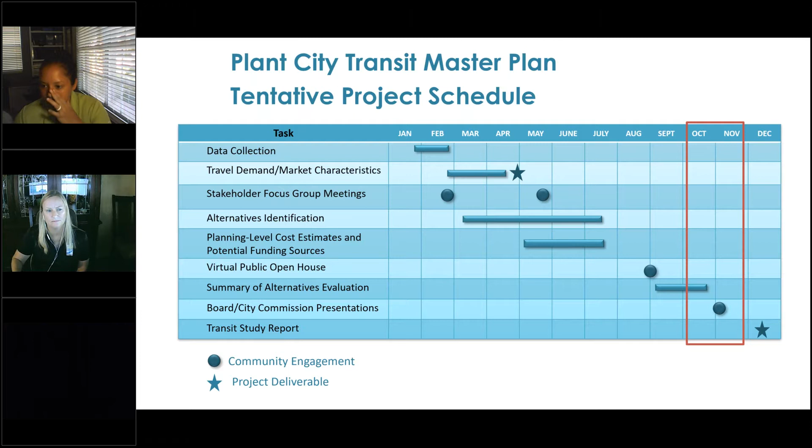As far as the project schedule goes, the schedule was extended because of COVID-19. We were hoping to wrap this up mid to late summer, but now we're at the part where we're taking it to our committees and board. We did have 3 rounds of public outreach, including 2 stakeholder focus groups, the second of which had a large survey outreach portion where we received about 120 responses, and then a final virtual public open house.

Those were services provided initially by HART from 2001 to 2005, and then extended through service grants by Plant City from 2005 to 2008. The highest ridership was in the 2006-2007 fiscal year with about 47,000 riders. There was also the 28X, the express route that went to downtown Tampa, with 2 round trips in the morning and 1 later trip in the day, operating between 2010 and 2017 with a peak ridership of just over 14,000.

As far as commuting patterns for this area, it is largely single drivers commuting. 84% of drivers commute alone, with a median travel time of 23.6 minutes, and 18% of residents travel less than 10 minutes to work. So it is sort of a large bedroom community with most workers traveling outside the area. Only 1.5% of households in Plant City have no vehicle.

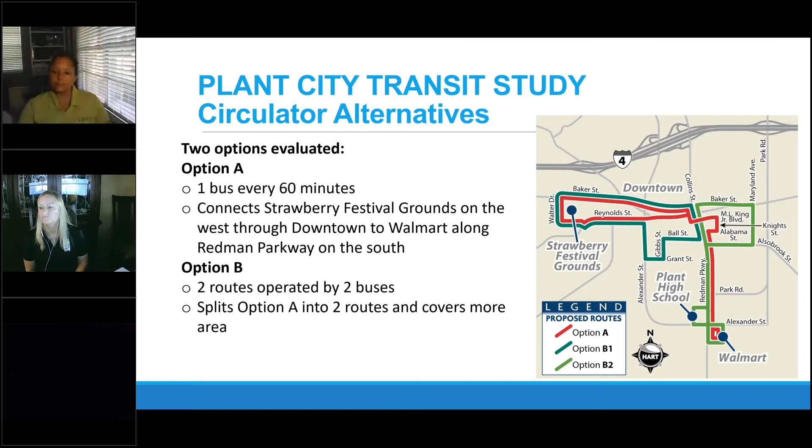As far as the circulator routes, there were really two scenarios looked at. Option A was one bus every 60 minutes, connecting west to the Strawberry Festival grounds, then through downtown and south to the Walmart. Option B mimicked that but separated it into two circulators with a more expansive route, still connecting Strawberry Festival with the Walmart, and a little further east of downtown.

Option C was looking at an on-demand service, similar to the Downtowner that we have in downtown Tampa. This was something the community did think was interesting, though they weren't sure if it would work immediately downtown within Plant City.

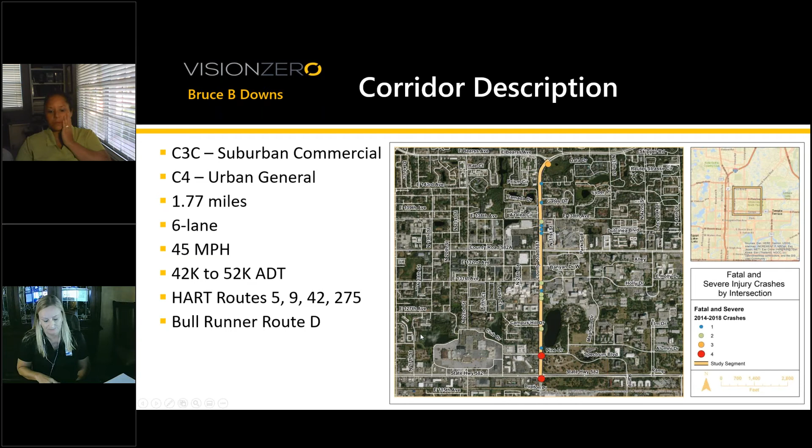Okay, so first up is Bruce B. Downs over in the university area. It's from Fowler up to Bearss, 2 contextual classifications throughout the corridor, so the recommendations reflect that - not quite 2 miles of length. This one's a more intense corridor: 6 lanes wide, 45 miles per hour, significant traffic counts, several HART routes, and the university transit option that traverses the corridor.

Over 1,500 total crashes, 28 of them severe and fatal. You'll see a lot of them occurred at nighttime, so you will see a lighting recommendation as one of the responses. And then we have a breakdown of how many involved our vulnerable users.

These are the locations - not surprisingly, a lot at Fowler Avenue. These indicate some special complementary projects outside the scope of this report that are going on, which are good news to add to the safety of the recommendations. And you can see we're still trending not in a great direction for our bicycle and pedestrian crashes.

So here's those projects. At Bruce B. Downs and Campus Hill, they're adding a new traffic signal, also at Richard Silver Way. Again, it's a dense residential area with lots of students traveling back and forth, not a lot of gray areas for them to have controlled crossings - so these 2 new signals will be amazing.

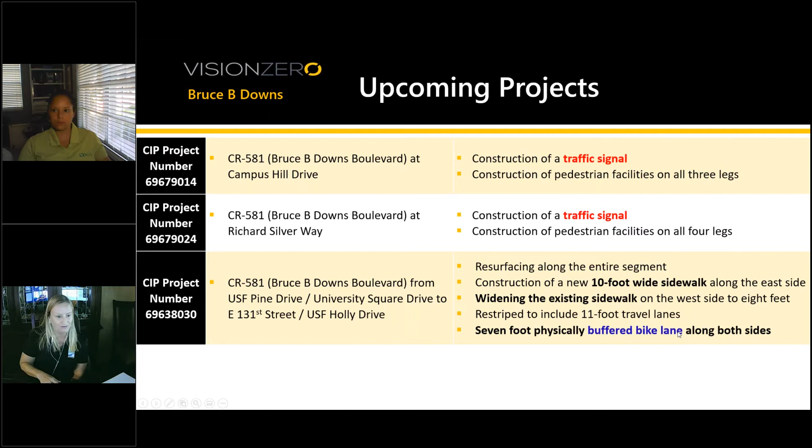Also, as part of the resurfacing, they're widening the sidewalk along this segment from Holly to Pine and adding physically buffered bike lanes on both sides. That's a really cool complement. So some other things for ours.

So the public outreach - what did they say? People said people are aggressively driving. Lots of turns from Bruce B. Downs onto the side streets were concerning. People driving too fast was the highest number one concern, along with walking and biking across the boulevard. Not surprising that that needs to get addressed.

So some corridor-wide recommendations: speed management, definitely - it would be great to target a lower speed along there. And then north, like I said, there's a different context, so a 40 mile per hour would be a little more applicable there. A lot of ADA issues with elderly sidewalks and ramps need to be brought up to code to help improve access.

Some signing and pavement markings, definitely - alerting people hey, you're supposed to stop, not keep going. Green pavement markings at conflict areas would help with that. This roadway also has swales and some standing water issues, so we're recommending improvement there, because it's not great to cruise through the puddles. And lighting, as I mentioned earlier, is important.

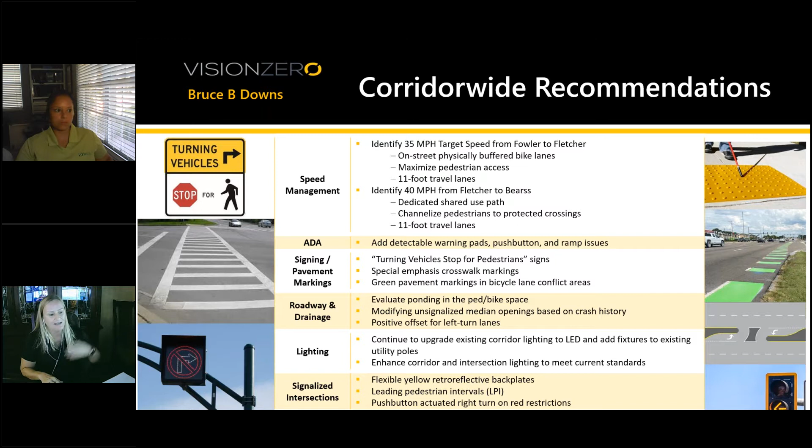Some signalized intersections need improvement to the already existing signals, with leading pedestrian intervals and push buttons so people aren't just sitting there forever and tempted to run across. At Bearss, we have channelized fast-turning movements, so some improvement to the geometry there would help safety. A new pedestrian crossing was seen as a potential at this location.

Definitely some special emphasis crosswalks, because some situations don't have that, or don't have all legs of them present. A potential bulb-out was considered on Fletcher, and drainage again. At Fowler, we're coordinating with the Department of Transportation - Alex Henry is on the call - and he helped provide DOT's improvements to a lot of things at that intersection, so we complemented and continued that effort heading north.

Okay, now I'm transitioning to Fletcher Avenue, and the crash locations were Nebraska, Florida, North Boulevard, and Rome. They had fewer crashes - 900 - but a lot of severe ones and a lot of bike/ped crashes. The types are rear-ending and angling, and they just flip-flop in ranking here between the severe and total counts. That's the type we're addressing in the recommendations along Fletcher, which is a different characteristic roadway - it's 4 lanes with the center lane being a dual turn lane, and it's a longer corridor at 2.5 miles.

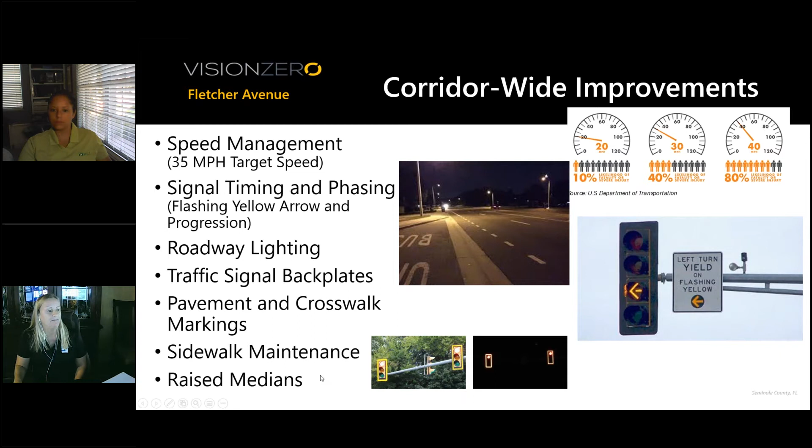So raised medians, I'll just show you one example. Since it has that kind of suicide lane, the dual turn lanes in the center, at key locations where we had crash problems we're adding a little raised median, enhancing the pedestrian crossings. There's a lot of gap between them, so with the appropriate study a potential new signal could be implemented at OLA. Reduced radii also helps with this — you can see they're very generous, designed for the car instead of the people.

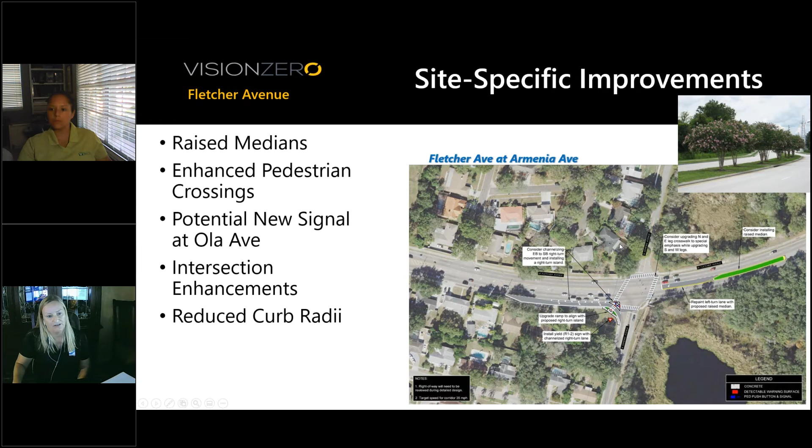All right, Lynn Turner Road from Ehrlich to Gunn Highway. The top crashes were at Ehrlich, at Gunn, and at Laguna Woods Court — same type of crash, rear end and angle, just in different order. 17 severe. This one has the same posted speed but is smaller, two lanes with a smaller traffic volume, so it's more of a residential connection between these two areas. You can even see some green space in between, reflecting that different context in our recommendations.

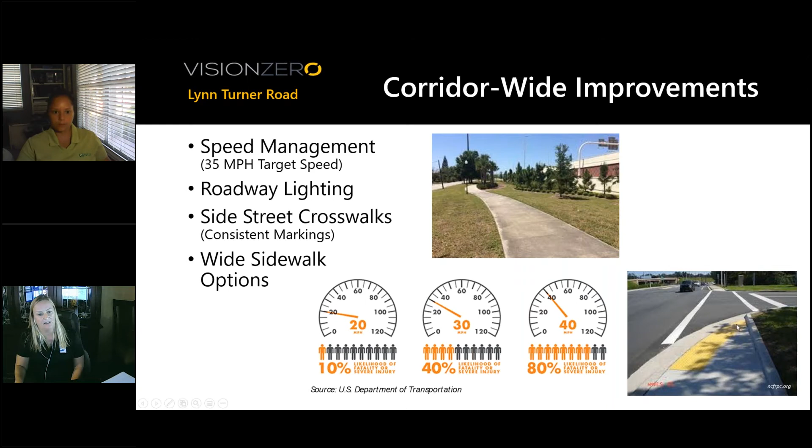What this community said is high speeds, unsafe turning movements, and poor lighting — those were their top issues. So we're addressing the speed, adding speed management, road lighting, side street crosswalks because that's where some of the issues were, and wider sidewalks. This is a pretty small sidewalk, so giving them a little more space, enhancing the pedestrian crossings, and a gateway feature at Gunn might be nice because of the stormwater feature there and the really fast turns. Then raised medians at key locations, especially in and around the school located along this corridor.

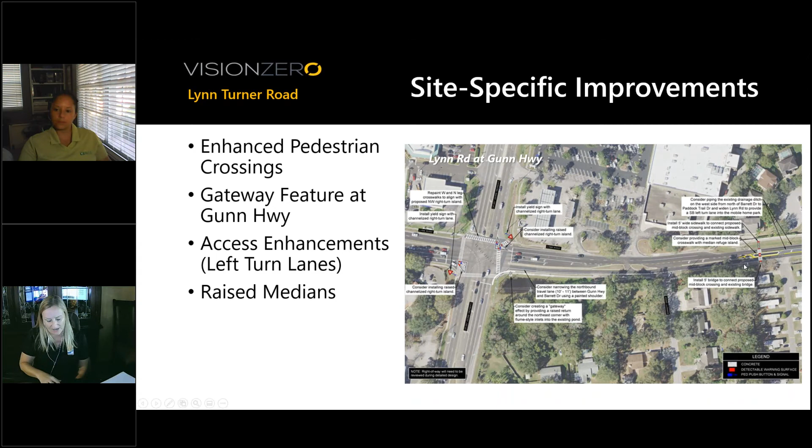I didn't say at the beginning, but it's probably evident by now that these reports are very thorough and complete. We're just hitting the highlights because we have eight of them to cover with you, but they're all in the packet and on the website if you'd like to see each location and get more details.

Last one for me, then I'll turn it over to Wade, is Sheldon Road. A lot of the crashes occur in the evening, and the majority were mid-block and at side streets. 78% of them, a very high percent of the fatal ones, were from the residential side streets. 64% of the bicycle and pedestrian crashes were actually in legal crosswalks. It's not surprising we have a lot of side street issues because there are many side streets along this two-mile corridor. We have 28 intersections and 24 bus stops, so it has a different context than some of the others.

So what did the people say? Well, 44% identified speeding — it's a straight road and they're flying down it, and that's what the people said. We also asked if they feel safe along this corridor, and you might guess with the narrow bike lanes that would be low, but even drivers only gave it 3 stars out of 5. So we got a perception of unsafeness on this corridor.

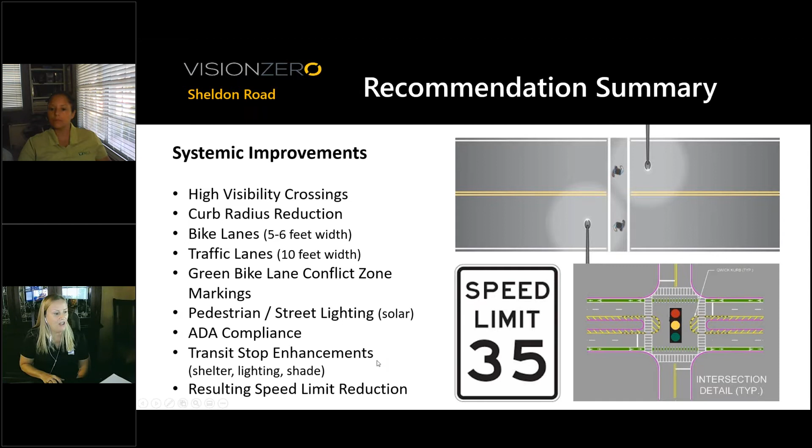And a lot of ADA issues to bring up the ramps and the sidewalk maintenance to meet that standard. Again, those 24 bus stops are just a lot of times maybe a bench or a sign, so some enhancements would be lovely. And this could all help with our speed limit reduction.

In this one, we broke down the initial countermeasures into some categories. These are identified for safe people, then we have them broken down for safe streets and safe operations. So things like signal timing and the leading pedestrian intervals are operation enhancements, and then there's the design of the road, and here the signage that helps people get around.

Well, I'll hit a couple of them. This corridor, again, Waters down to Hillsborough. If you're familiar with the area, this is a Publix, 7-Eleven, and then a big shopping center, and this is Old Memorial. Again, this goes at a curve, and this comes in at a weird angle.

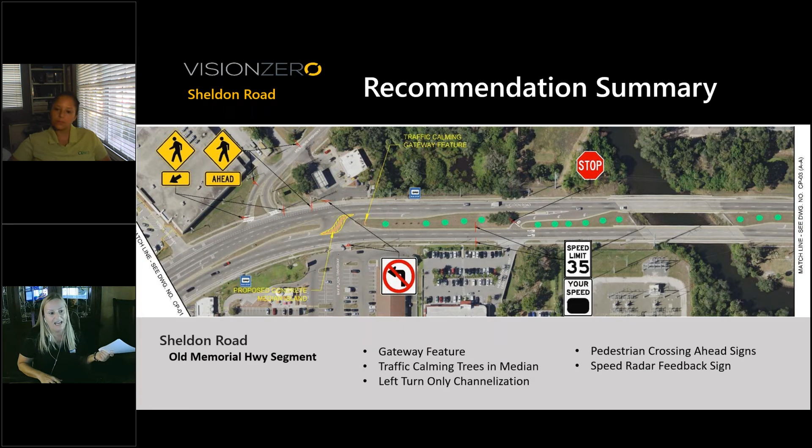To help improve the safety here, we redesigned the median so that people aren't trying to illegally go around and cut through, or cut through this 7-Eleven to get across. So some median design all along the corridor. They have some lovely street trees, but it's sparse. Since there's a very generous median on this corridor, adding some landscaping and a little more verticality along the whole thing would help calm things down.

Signage-wise, this one happens to have the Upper Tampa Bay Trail crossing. We observed when we were out there that the timing is completely off, so drivers get frustrated sitting here as if it's a 4-way intersection signal instead of just a quick crossing for trail usage. I live in this area and I wasn't super aware of this crossing because it's not signed well. Enhancing the signage that it's there and that it connects up to the Upper Tampa Bay Trail would help the community as well as those using this area and the drivers.

So that's one theme. Then we have 2 private schools. It's designed for the one, but we recognize that the one across the street is not just a daycare, it's a full-on school. So designing this to meet the new Florida statutes and bring the school zone up to code is one step. And here there's a lovely median, but it's not helping all these pedestrians get across the corridor. Again, 28 locations, and they're having to run. If they need refuge, there's not really one, so extending it so that there actually is a refuge.

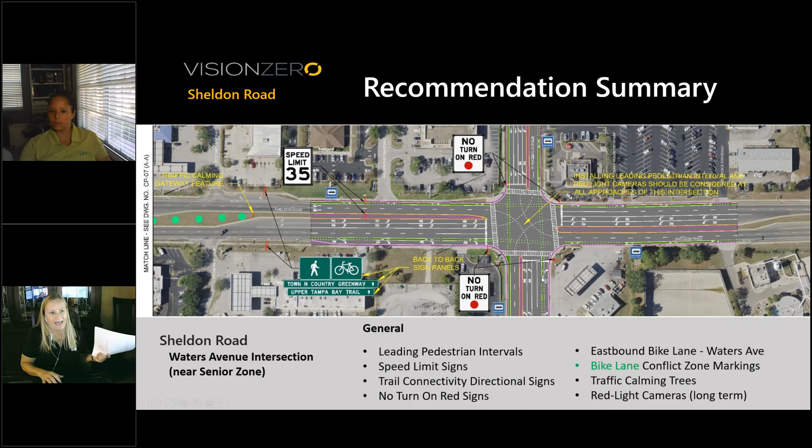But we have 4 more, so I won't belabor this, and I'll turn it over to Wade.

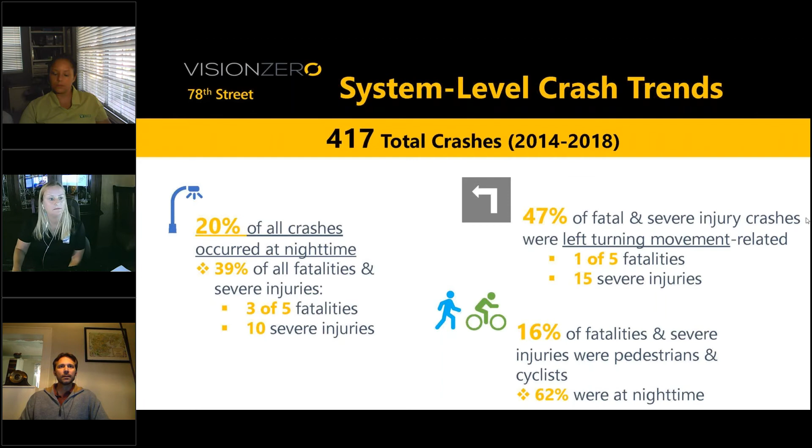So let me make him the presenter. There's the button. Right, there we go. Oops, let me get that over there and see if that'll work.

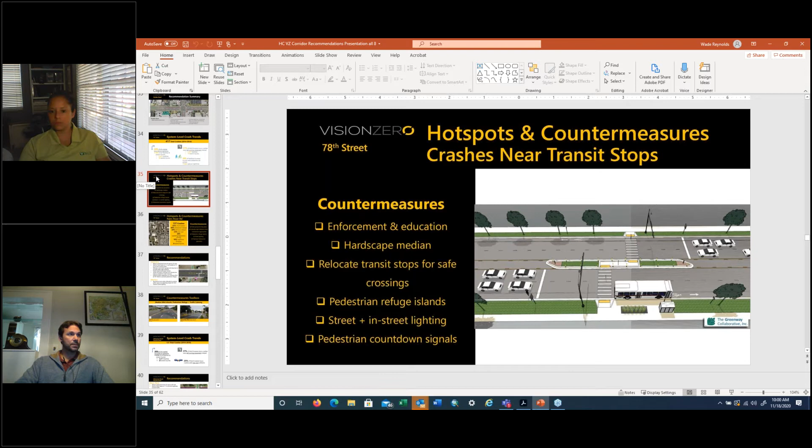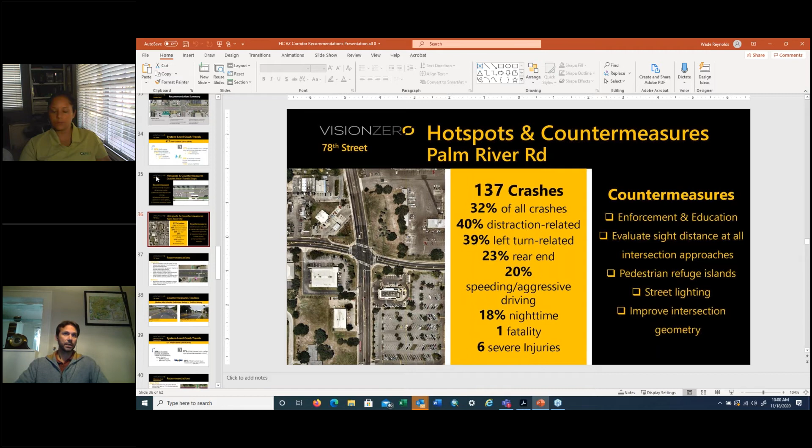So just to use one example, Palm River Road, the intersection at Palm River Road was one of the major crash locations, accounting for about a third of crashes on this corridor. Again, a lot of those were left turn related and distraction related. So looking to evaluate the sight distance at all of those intersections, improving the intersection geometry and street lighting are major considerations here.

Looking at the entire corridor, some short-term recommendations involve reducing the speed from 45 miles per hour to 35. To accomplish that, we would look to narrow the lanes from 12 feet to 11 feet, provide an outside buffer, install raised landscape islands and crosswalks.

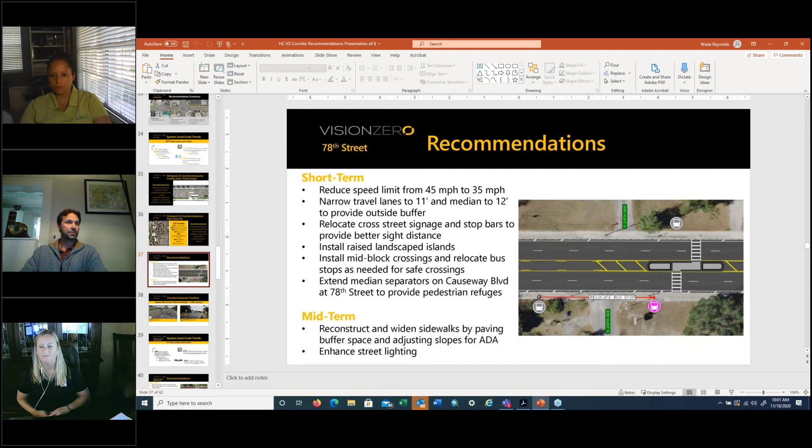As you can see in this picture, relocating those bus stops in a couple of locations to allow them to be right by those proposed mid-block crossings so people will use those instead of running across the street. In terms of slightly longer term recommendations, the proposal is to reconstruct and widen the sidewalks, adjusting slopes along the corridor for ADA, and enhancing street lighting throughout the corridor.

Just a couple of examples - these are both from Jacksonville, but this is what either those mid-block crossings or those center median treatments can look like, along with a slightly increased outside buffer on the roadway.

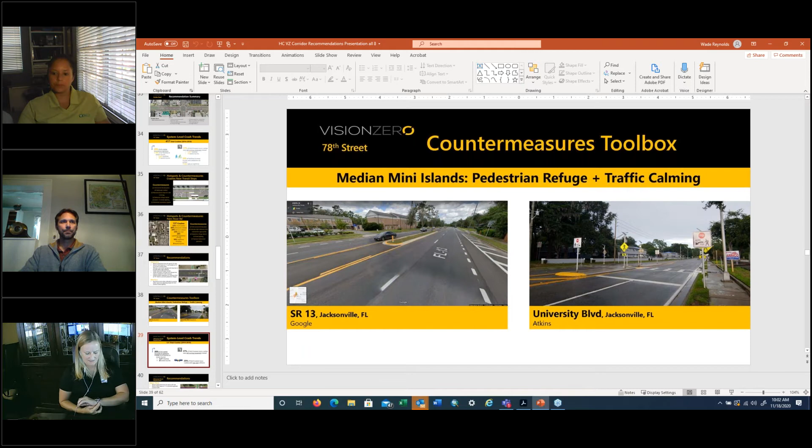Moving on - this says Gibsonton Road, but it's Gibsonton Drive, which turns into Boyette Road. This is a 4 and 6 lane high-speed facility. It handles a high volume of traffic, and you'll hear this a lot throughout these corridors. A lot of left turn and rear end movements are some of the major crash types we're trying to prevent.

So looking at Gibsonton Road, some short-term recommendations: reducing the speed from 45 to 40, accomplishing that through narrowing the travel lanes as well as some other treatments. Providing crosswalks at all the intersection approaches, filling in sidewalk gaps, extending median separators at intersections where feasible, and limiting some of these all-way movements.

As you can see in the graphic on the right, that would require left turn movements on the main through area on Gibsonton Drive, and not allow all the movements from the side streets. So if somebody was trying to make a left from Oak Ridge Avenue, they would have to actually make a right and go up to an intersection in this case.

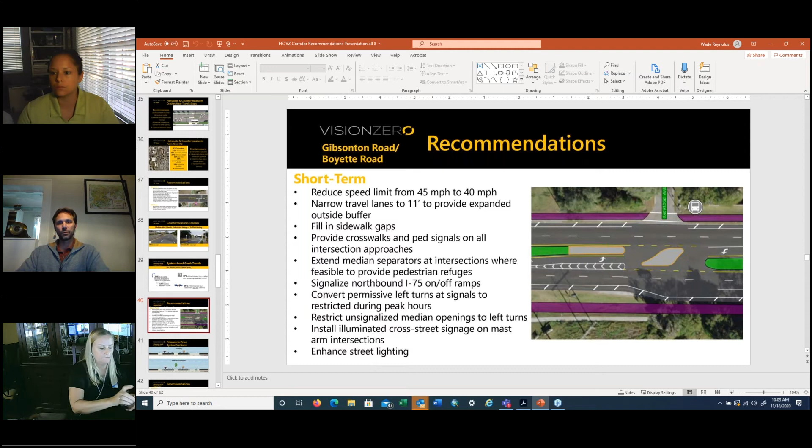So there are certainly some things to balance there, but these are important safety treatments, and trying to make an uncontrolled left turn across 4 to 6 lanes of traffic moving 45 or more miles an hour is somewhat inherently dangerous.

So there is a proposal from 301 to I-75 to widen to 6 lanes. That is in the long-range plan as well. So how do we accomplish that?

So starting at US 301, this is the eastern side of US 301 in this picture. There are major backups for traffic moving westbound. So this proposes adding an additional westbound left turn lane, just through some reorientation of the travel lanes here.

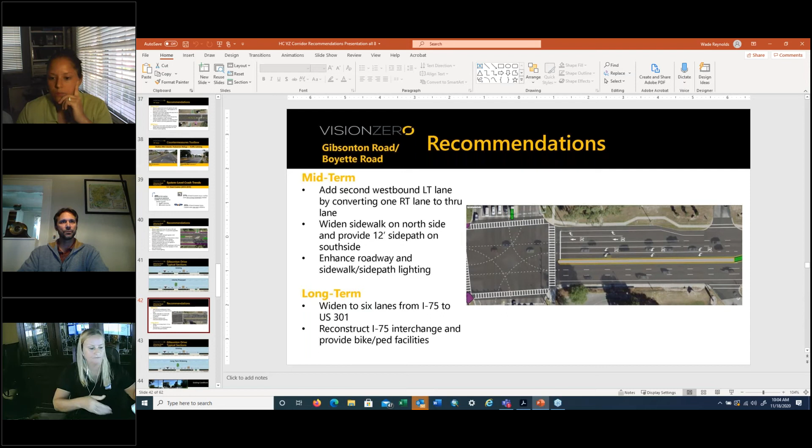So this is a programmed capital improvement roundabout at Old Hillsborough Avenue and Mango Road. This is a great example of something the county is already working on to improve safety in the area, and we totally agree with this improvement, as well as adding speed feedback signs due to the grade change. There's actually quite a good bit of hill and grade out here.

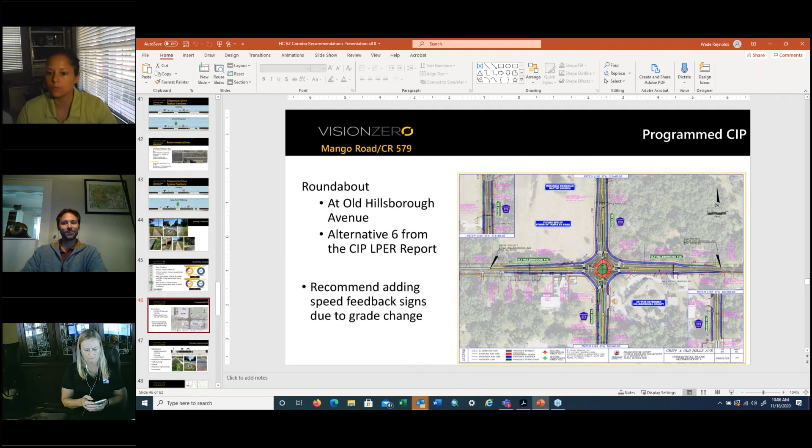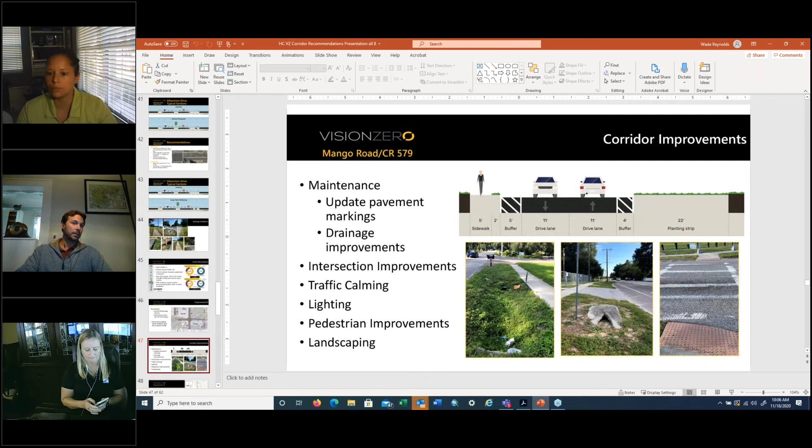So looking at some of the other issues, there's continued maintenance needed, updating pavement markings, and drainage improvements, because a lot of what happens on the roadway shoulder here is that sand from the drainage areas runs into the sidewalks and makes it difficult. Additionally, traffic calming, as well as lighting and other pedestrian improvements, which I'll get to now.

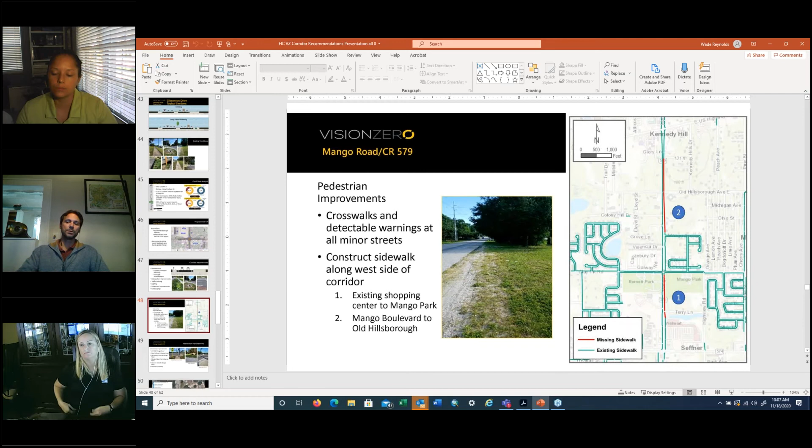So two of the main gaps on Mango Road are labeled 1 and 2 on the right side. You can see by the pattern on the shoulder that people are using these, moving up and down them, or crossing in unsafe locations to get to the complete sidewalk on the other side. So those are pretty important recommendations.

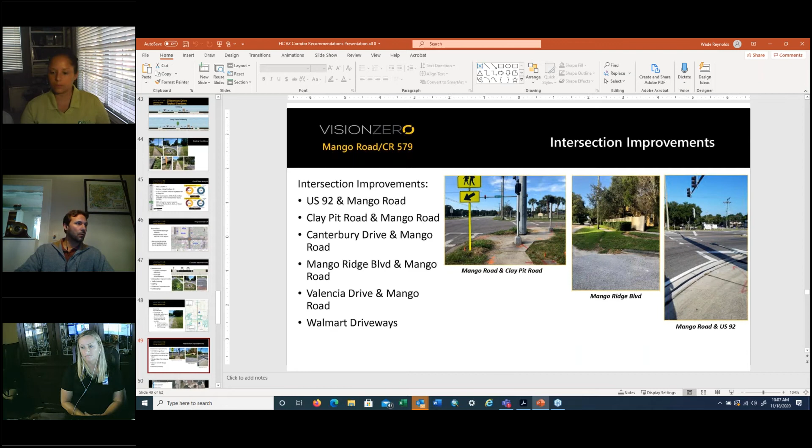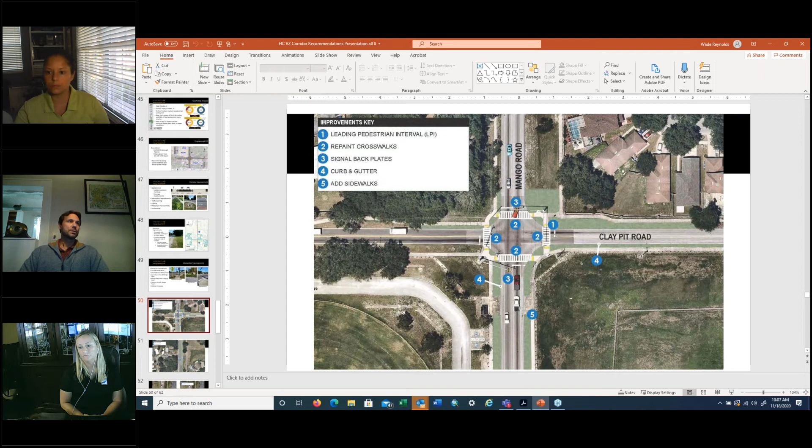Just a couple of notes about the intersection improvements noted throughout the corridor. These are some of the existing intersections. This is an example of Clay Pit Road, but generally pretty consistent throughout. Leading pedestrian intervals are proposed, as well as signal backplates to make those easier to see for drivers, as well as curb and gutter, adding sidewalks, and repainting the crosswalks at all of those locations.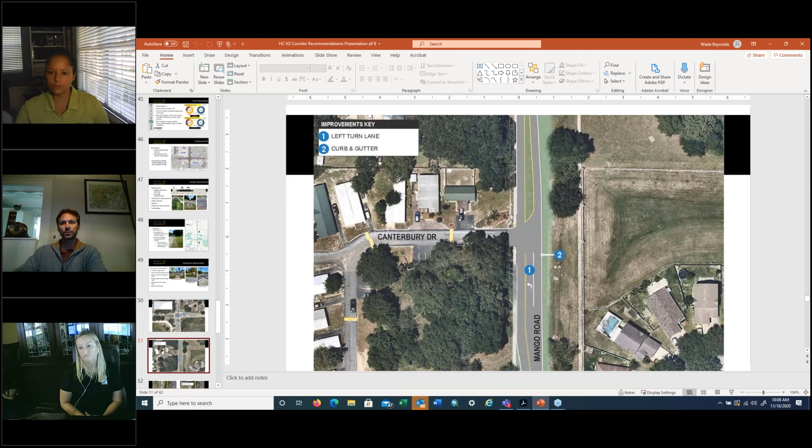So just a couple of other improvements: curb and gutter, and adding left turn lanes where feasible into the neighborhoods, which will eliminate some of those rear end crashes and some of the general conflicts throughout the corridor.

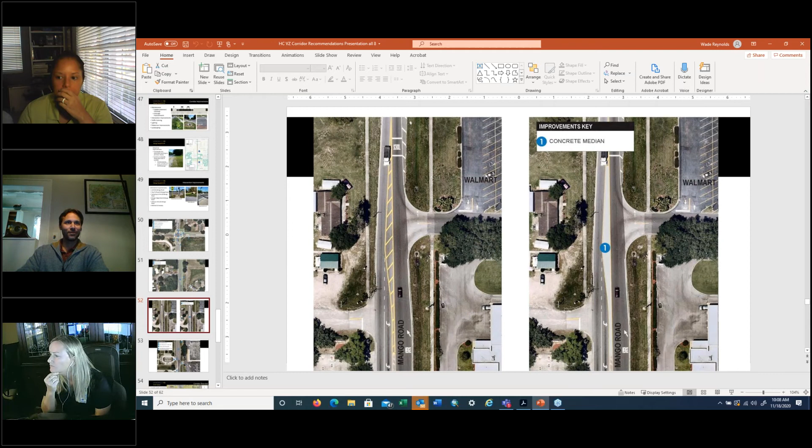Then at the southern end of the corridor, there are two entrances to the Walmart. What you see here is the southernmost entrance. MLK is immediately to the south. This proposal is to limit the free turning movements in and out of that southern driveway to the Walmart. There are some other issues that need to be evaluated with this — there are some single family homes down to the left there that would be blocked from making a left turn in. But as you can see where that turn lane is to go onto Martin Luther King, that's a pretty serious intersection to even be making that movement in. And you can see from the dirt, or the oil, on the roadway that this is a pretty frequently made turning movement.

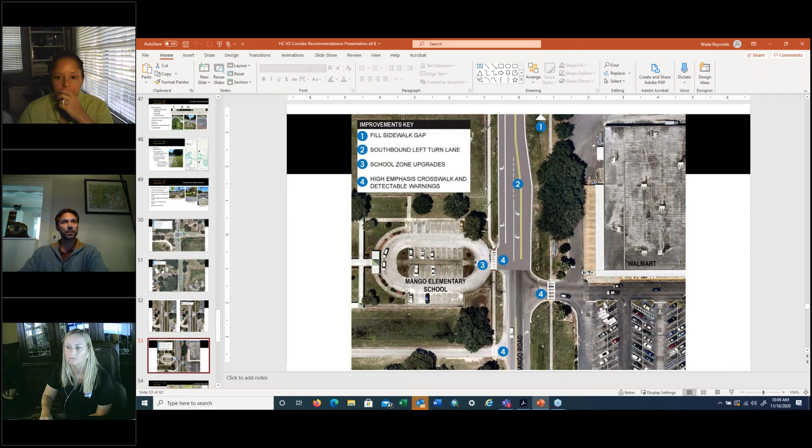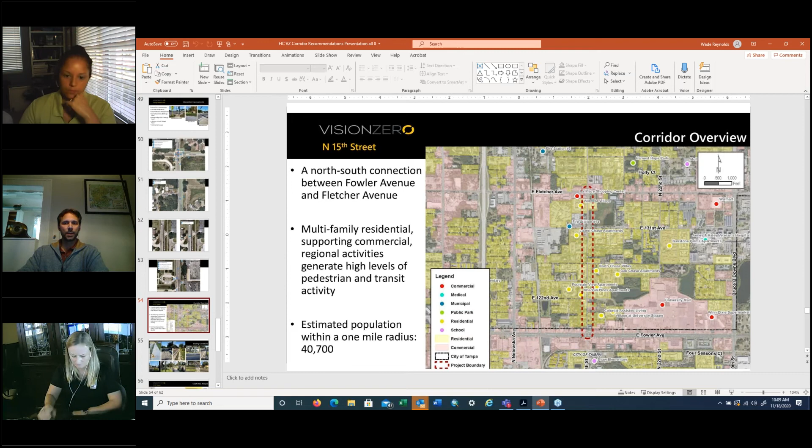Again, some of the existing conditions here are pretty similar to what we saw on Mango Road — sidewalk gaps and other issues, with a lot of people walking and riding in the streets where those facilities don't exist.

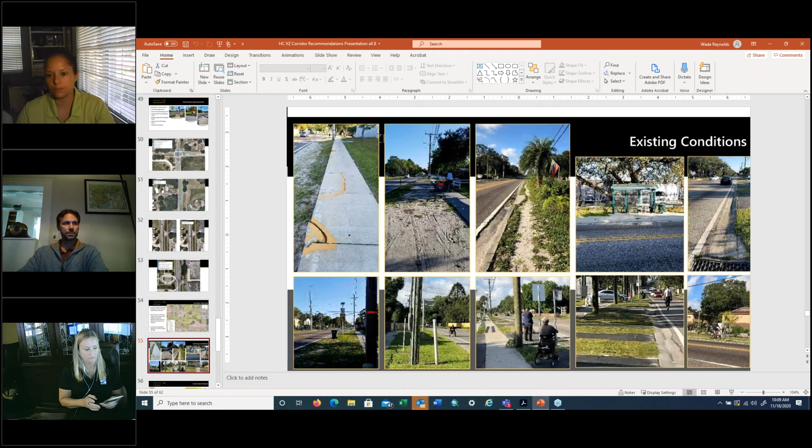So again, rear end, angle, and left turn crashes are a big part of this, and many of those safety concerns were noted as a need to widen the sidewalks and slow down the vehicles. The lack of marked crosswalks for pedestrians and lack of sidewalks were also major noted concerns.

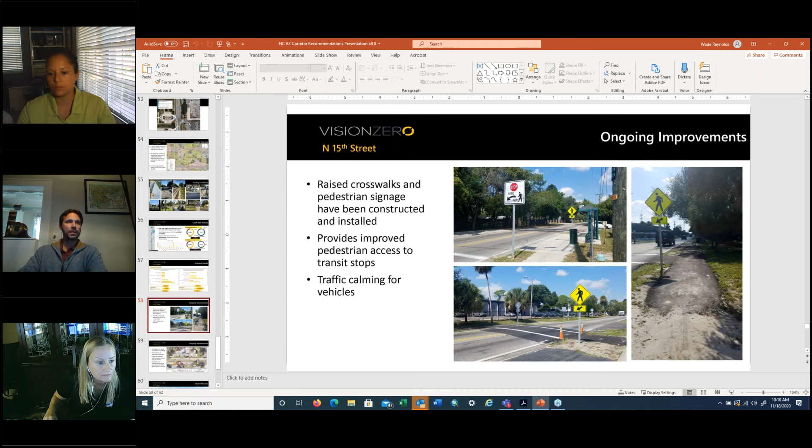So the county is currently doing some great improvements out there. They've really taken the initiative to do traffic calming, raised crosswalks, rapid flashing beacons, as well as filling in some of those sidewalk gaps. And really, they have looked to do these near the transit stops where people are crossing. This is just a section from the plans of that project.

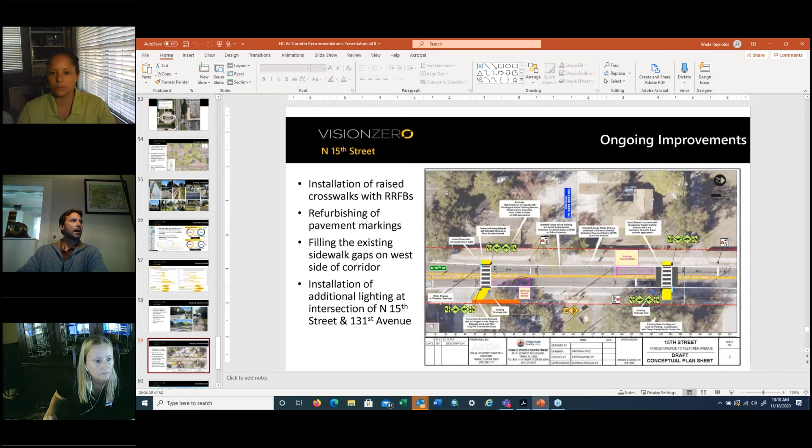Really can't say enough good things about those ongoing improvements.

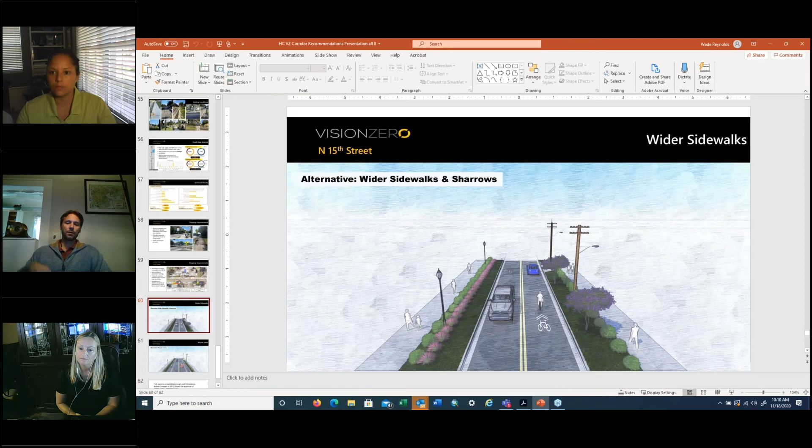Just to show you some of the longer term improvements discussed for this corridor, here is one with wider sidewalks and sharrows that could fit basically within the existing pavement. There might be some utility issues within those buffers we're still working through. Another option would require a little greater pavement width with buffered bike lanes, and again, sidewalks and landscaping. So that concludes the presentation.

The full reports are available at the link in your agenda, and we are asking that you forward this with any comments you may have to the MPO board for approval. So thank you, and happy to take any comments or questions you might have.

Thank you, Wade. Do we have any discussion or questions from the group? I do see some in the chat. Would you like me to address those first? Sure, okay.

Our audience member, Abigail Flores, asked if realignment of skewed intersections was considered for any of the intersections. I didn't have any, but Wade, do you have any offset intersections? Palm River Road and 15th is one we did look at a little bit for longer term improvements. The geometry of that intersection is very difficult and creates a lot of issues. Where we do have those offset intersections, which is only a couple of locations, at least signalized, that has been a consideration, trying to smooth those out and make the crossings easier where we can.